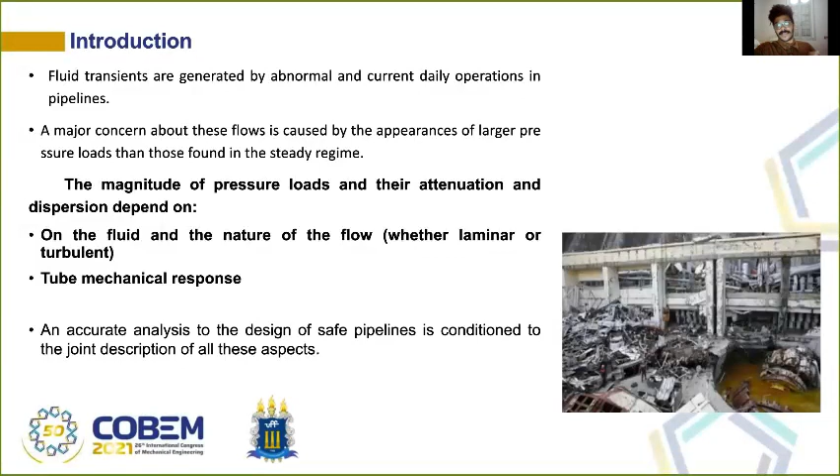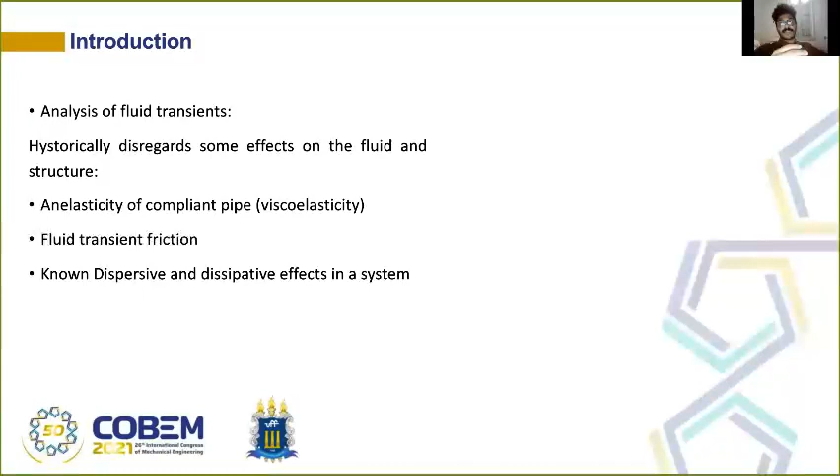So shortly speaking, some known effects that happen in the transient flow were disregarded because of the complexity of the modeling. It was, for example, the anelasticity of the compliant pipe, viscoelasticity, mechanical behavior of the pipe, fluid transient friction. But those phenomena are known to add dispersive and dissipative effects on the fluid pipe system. So, for example, the analysis of the fluid.

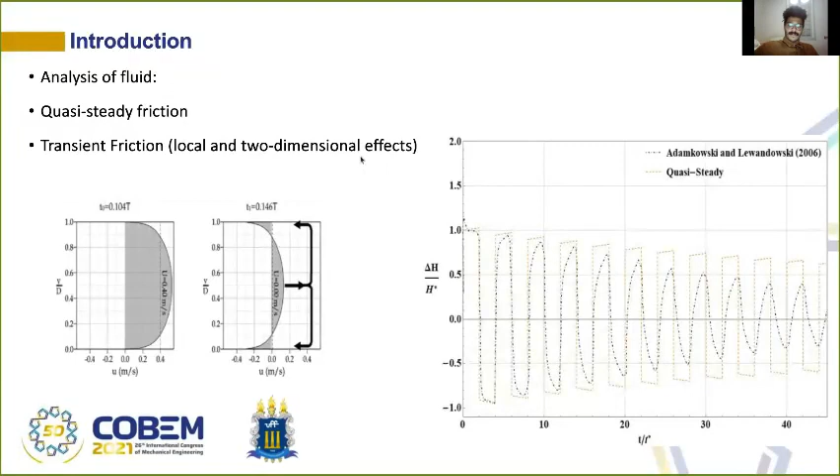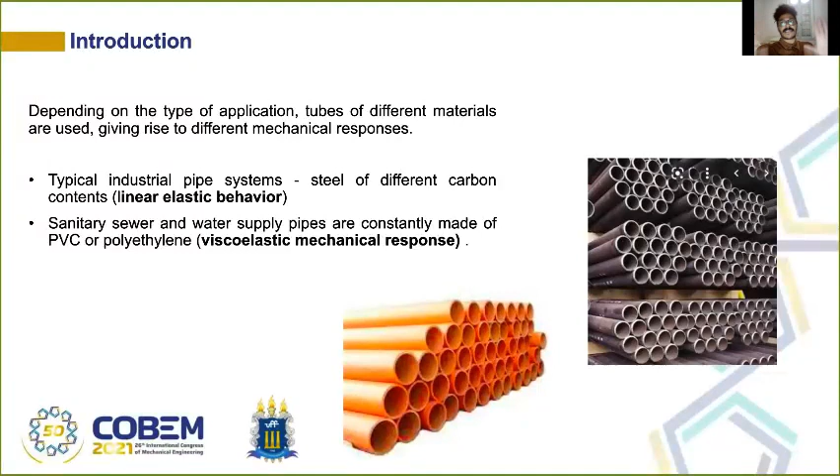So depending on the type of application, tubes are made of different materials, giving rise to different mechanical responses. For example, typical industrial pipe systems are made of steel of different carbon contents, and this kind of pipe falls into the category of linear elastic mechanical response. Sanitary sewer and water supply pipes are commonly made of PVC or polyethylene that falls in the category of viscoelastic mechanical response. So depending on the application, different responses of the tube are actually happening. And what is the influence of that on the transient? This work will just give a glance of this effect.

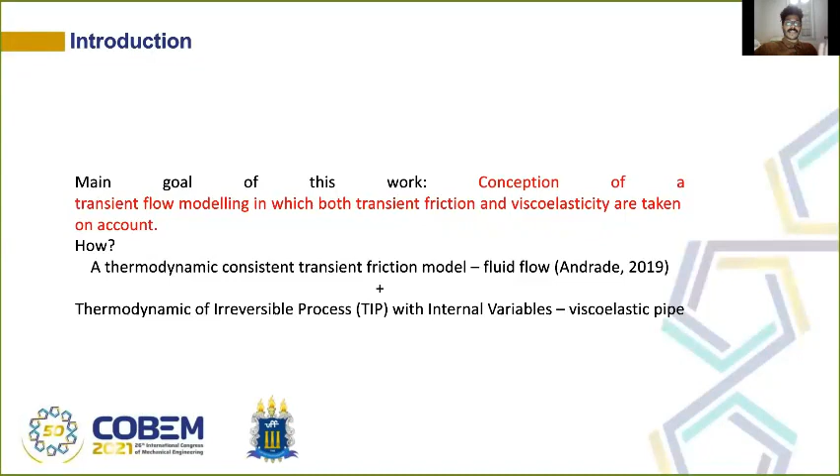So the main goal of this work actually is the conception of a transient flow modeling in which both the transient friction and viscoelasticity are taken into account. We use a thermodynamically consistent transient friction model for the fluid developed previously by one of the authors, and to treat the viscoelasticity of the pipe, we will use the thermodynamics of irreversible processes with internal variables. So we will take it slowly to get all the details of this model.

So first, the consequences. We will see the influence not just of the transient friction during the transient flow, but also the influence of the viscoelasticity in the mechanism of the fluid transient. And as the model is based on a solid thermodynamic framework, we will be capable of computing the dissipation on the fluid and on the pipe. This set of characteristics can be used as a sound tool for practical and theoretical analysis, for further analysis of hydraulics.

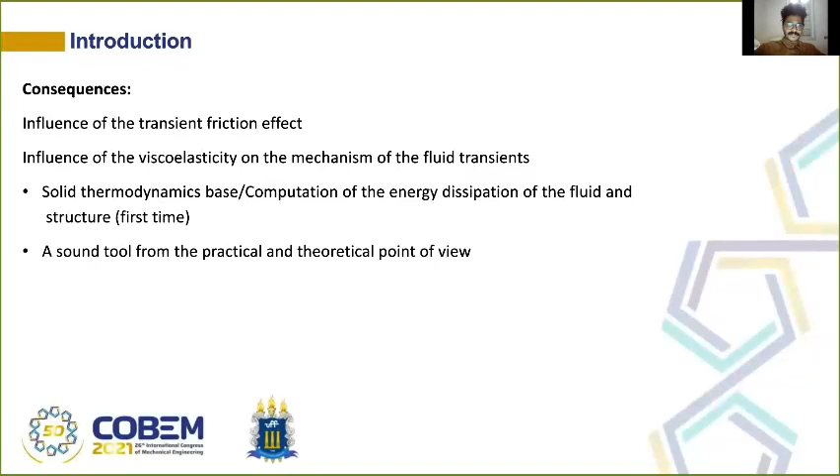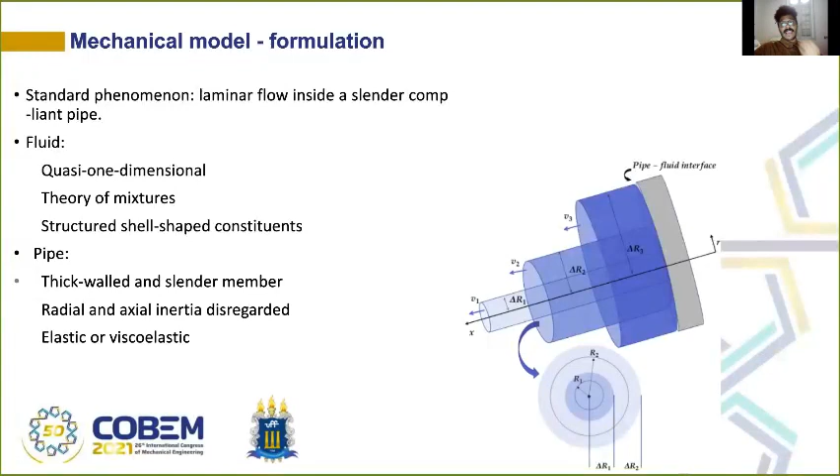So the mechanical model formulation. The standard phenomenon to be analyzed here is a laminar flow inside a slender compliant pipe. The fluid is quasi one-dimensional, but it's viewed as a structured mixture formed by shell-shaped constituents. That is, this setting is just to capture those velocity gradients that I showed in the previous slide. The pipe is assumed to be a thick-walled and slender member. The radial and axial inertia is disregarded, and the pipe can be elastic or viscoelastic.

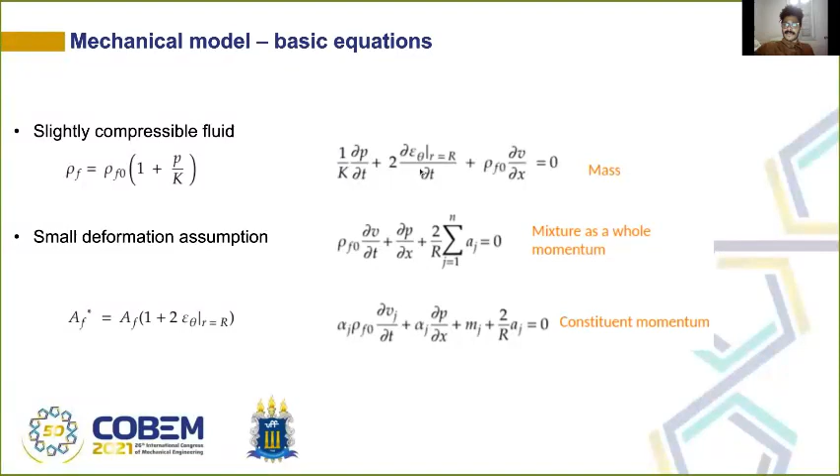If you assume that the fluid is slightly compressible and that the deformation of the pipe is in the category of small deformation, we find those basic equations. As you can see here, the strain of the pipe appears. The constitutive equations for the pipe are needed because, as you saw in the basic equation, the circumferential strain of the pipe appears.

So the anelastic, viscoelastic behavior of a solid material is linked with microstructural rearrangement of the material that is directly linked with dissipative mechanisms. So to treat that properly and with thermodynamic consistency, we will use the thermodynamics of irreversible processes with internal variables. What is the core of this theory?

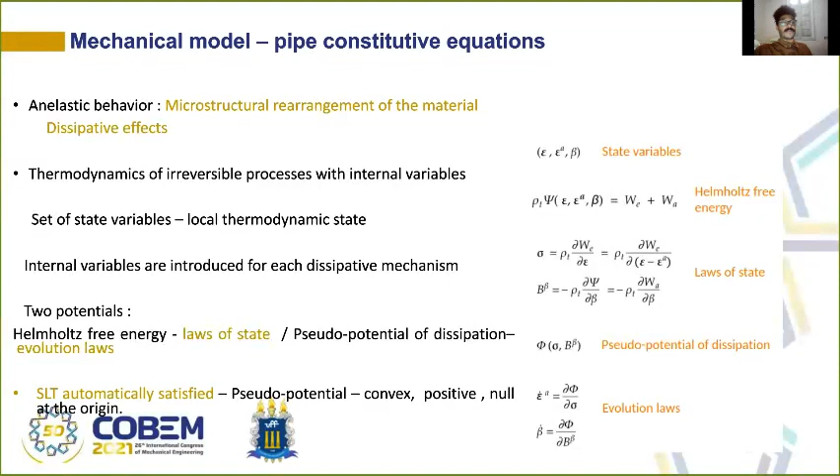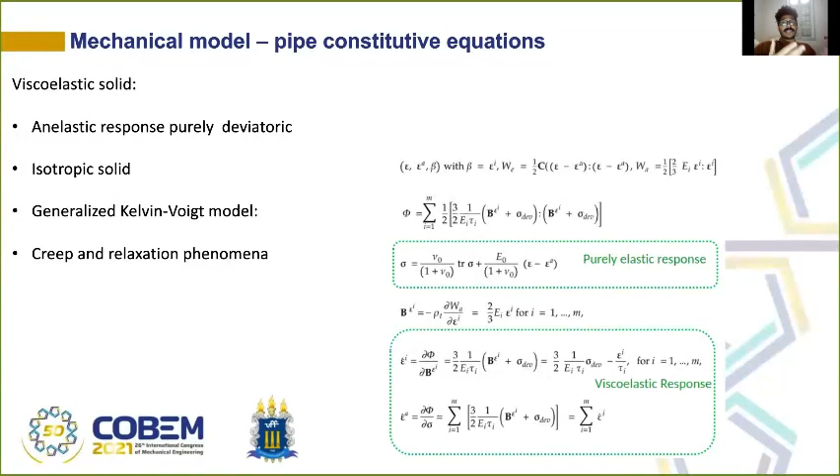There is a set of state variables that gives the local thermodynamic state of a material, but beyond the common state variables of a solid, internal variables are introduced for the dissipative mechanisms that happen because of the inelasticity of the material. And beyond that, you have to postulate two potentials, that is the Helmholtz free energy to find laws of state, and a pseudo-potential of dissipation to find evolution laws. As the solid is viscoelastic, we assume that the anelastic response is purely deviatoric. The solid is isotropic. The model of viscoelasticity applied here is a generalized Kelvin-Voigt model.

We compare the response of the proposed model with the experimental data of Covas 2005, in which the Reynolds number is approximately 1,000. And here we put the proposed model for a viscoelastic material and the proposed model for the elastic material. And here is the experimental data of Covas. So it's clear that the proposed model has similar responses when compared with the experimental data. If you compare with the elastic response, you can find faster damping and delayed response. And it seems to be clear that the last case is not capable of representing the experimental data.